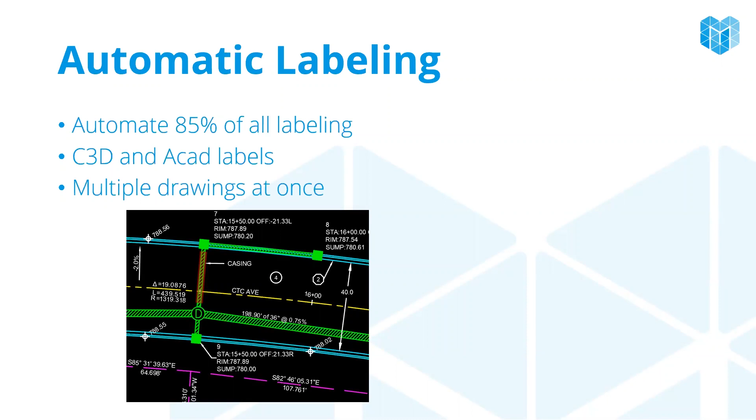Here's a screenshot of the UI, and I'll show you it in action in a bit. We get to choose our drawing sources, have detailed selection on what layouts we label within those drawings, choose what type of labels and anchor objects we want, and then have detailed control on the fields or data showing up within those labels. In the case of mText, we can pull in AutoCAD fields automatically. In the case of something like a line and curve label, that's based on your Civil 3D style. And down here, we've got detailed control on the formatting itself.

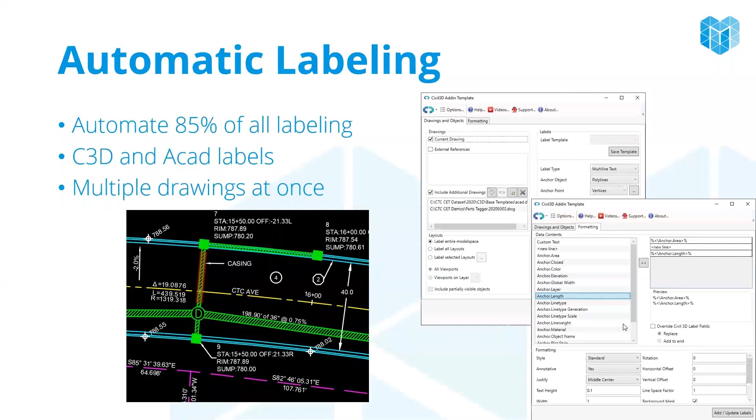Let me show you what this looks like. Let's take an example of a bunch of lots, and we need to label all of these lots at once.

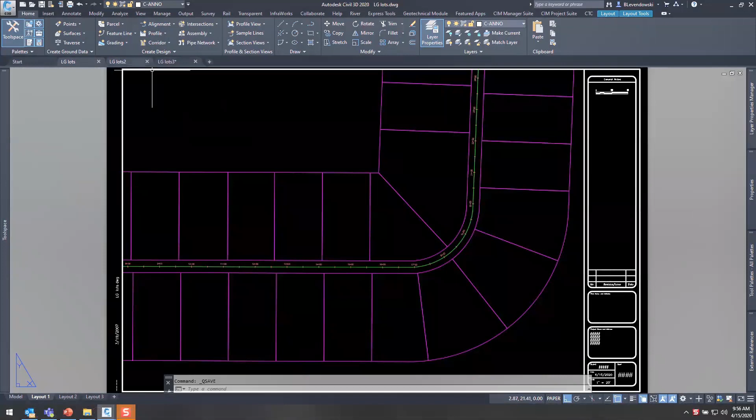Line and curve labels, it's a common thing, and we're picking these one at a time, one lot at a time. Now there are the parcel tools in Civil 3D, but a lot of people don't use them because they leave a lot to be desired. But what they do for us is help with some labeling.

Now we can do this across any kind of line segment. I'm going to choose polylines in this case. We're going to label the segments. I've got 3 drawings open here with multiple layouts in each. I've selected all these drawings, then I choose my styles and click add labels. Watch this—it comes into every layout in this drawing, and also in my 2 other drawings. We just added thousands of line and curve labels at once across multiple drawings. The time savings are huge on this stuff.

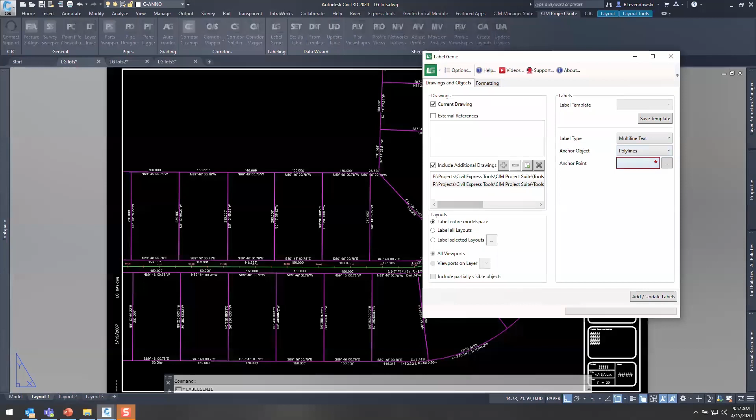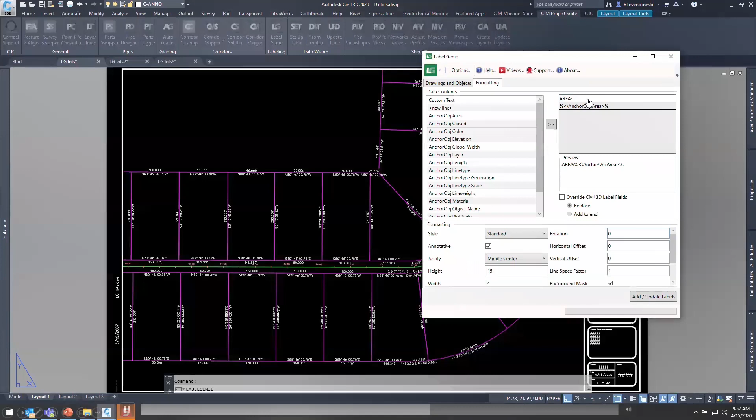Now Label Genie does over 100 different label scenarios. I've only got time to show you a couple here, but let's take something like mText on those same polylines. What if I want to place mText at the centroid of all of this stuff? It could be on hatches, feature lines, anything. Again, I've got style formatting down below, choosing my text type, these kinds of things, and I also spell out what component is going to label in that mText. I can push all those labels at once, all of these.

Now I'm starting with something simple here like polylines because this is the area that's really, really tedious in Civil 3D. We get some automation here and there, like I said, in pipe networks.

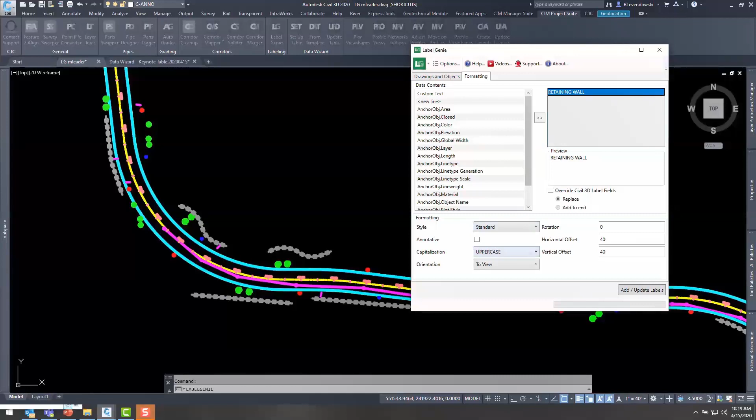Take something like this on a road project where we just need a bunch of callouts—let's take these retaining walls. I just want to insert leaders across all this stuff. Normally I'm picking and picking on all this stuff, but I can spell out some custom text, choose my MLeader style, some offset options, rotation options, and boom, it inserts across the whole drawing.

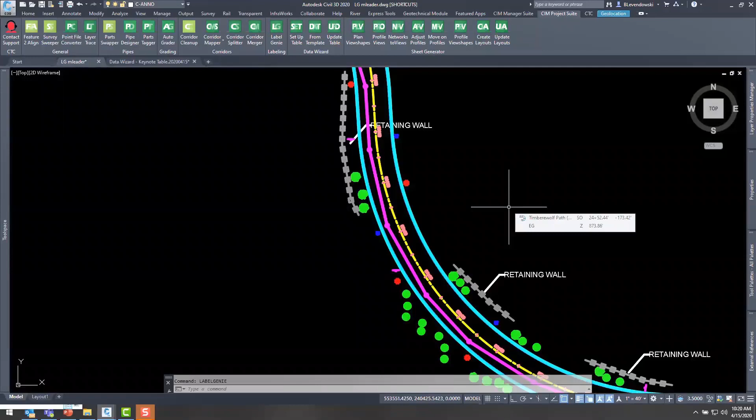Again, we talk about that 85% because you're going to want to come in here and tweak things a little bit. But I can spell out a label type, an anchor object, filter by layer, all these different controls, and automate that. I could spend all day showing you scenarios on this—there's over 100 label scenarios. You want to attach surface spot elevation labels to feature lines based on a certain surface, we can do that. Everything is there. So that tedious pick and click that you're used to, you don't have to do that anymore.

Let's talk about site grading in Civil 3D. A huge pain point in Civil 3D.

Let's think about some of the tool sets in Civil 3D. You've got pipe networks, dedicated tool sets for storm and sanitary design. And we've got corridors, which are great for road design and anything else linear, be it airport or rail or any number of things. But site grading is really clumsy. And when I say site grading, I'm talking about grading out parking lots, ponds, and residential lots, this kind of stuff. What are we stuck with?

Feature lines, which are nice and stable, but really tedious. One at a time, you have to update vertices on all of these. And then we've got grading tools, which are nice in theory, but really buggy, and they just don't really work. Anyone who's tried it knows that. Some people use corridors for site grading, but for the average user it's way too complex and confusing to use corridors.

With AutoGrader, we're looking to solve this. Take a simple site like this, where I've got a parking lot, a pond, and some grading around a building. We're going to be able to automate this grading by linking feature line sets.

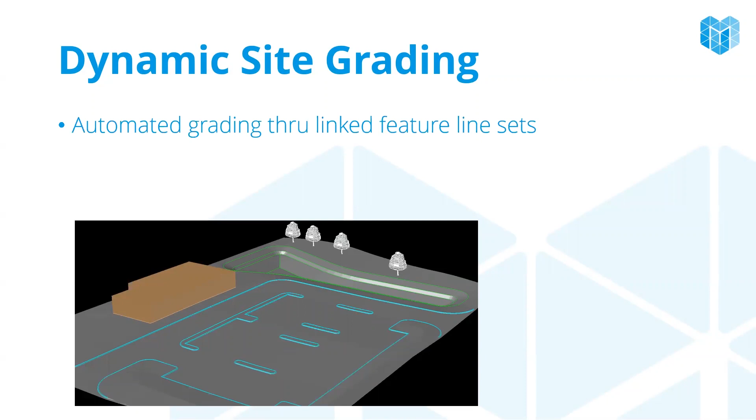Now you have to lay out some kind of base design for your project. But say you draw your gutter lines for your curb, you're then going to be able to spell out what we call grading families in AutoGrader, where you define parameters: offsetting to the left or right, the distance, and the slopes. AutoGrader even gives you a preview of what that template looks like. You're going to be able to execute these grading families on any number of feature lines.

And it's not just a creation tool, it's an updating tool as well. So as those designs change, you can refresh those families and everything will update. And better yet, think about your surface. That's what you're after, right? That's the end product of your grading. It's going to automatically add and manage all this stuff inside your surfaces as well.

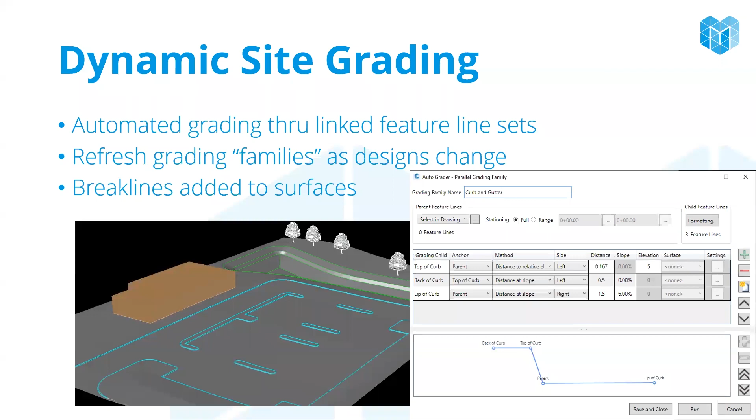Let's take a look at it. Here is that same site, and I've got some primary feature lines drawn for my curb and my pond. But now what would I be stuck doing? Doing all these stepped offsets. And then as soon as things change, it's really tedious.

So I'm going to go in here and create what's called a parallel grading family, where it automates 3D offsetting of feature lines for us. I'm going to define a top of curb, and as I do this, the preview updates down below. This is really cool, really intuitive on how you spell this out. The top of curb will be linked to the parent feature line, that's the red feature lines we see for curb there.

And then I can spell out the back of curb, just like we have for subassemblies and corridors. We can spell those parameters out here, but now we can save them in a grading family, and execute them on any project, on any set of feature lines.

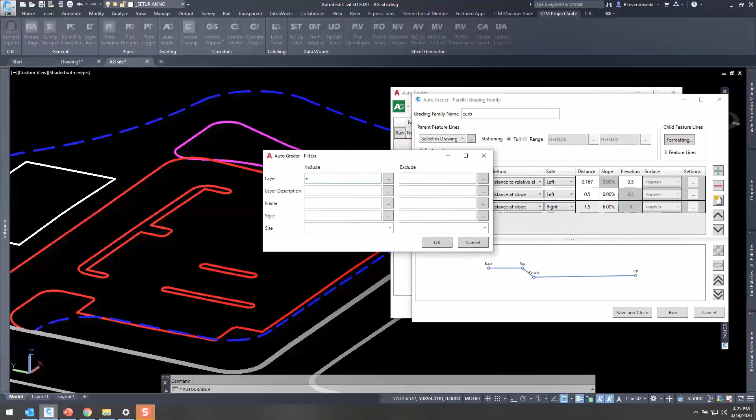I'm going to choose a layer so it grabs all the feature lines on that particular layer. I've got formatting options so I can control what styles and layers are assigned to these feature lines. And then finally, what surface will all these feature lines be added to? I've got break line settings, both supplementing factors and weeding factors.

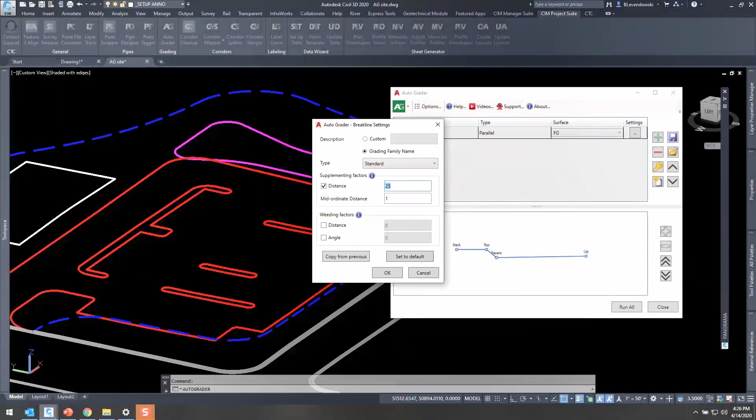And then I'm going to click run on this, and you're going to see on the left here, my entire parking lot graded out based on those parameters. Dozens and dozens of feature lines. Normally I'm creating those one at a time.

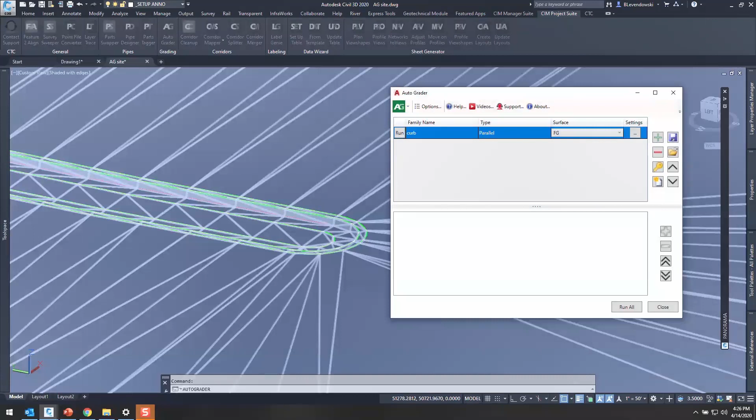And here's the thing, I kind of did this on purpose. We made the curb backwards. When you're automating something like this, it can be easy to choose the wrong side, left or right. I simply go in here and switch everything. I run it again, and watch all of those green feature lines, the automated ones, update automatically across the entire parking lot. And everything gets added to the surface as well.

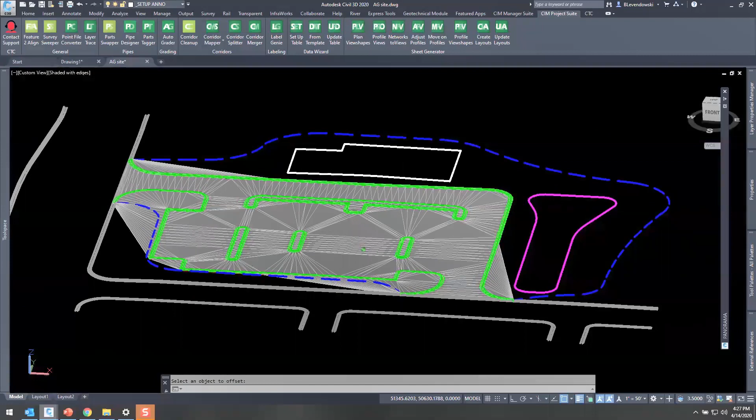Now these kinds of things you repeat from one project to the next. So I can load templates I've created from previous projects where I've got, in this case, all my benches and slopes defined for my pond. I simply run that template. I can edit it if I want, and then it executes on that pond feature line.

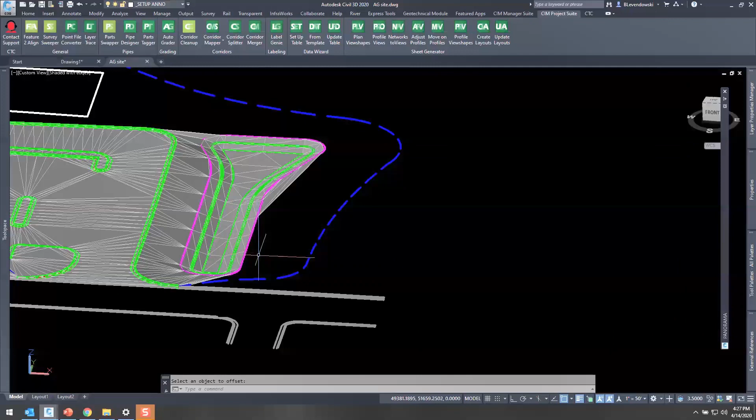Think about other scenarios, grading around buildings, simple daylight grading. I can load those templates. Those are external template files, text-based JSON files. They're really easy to work with, but you can load them right into here.

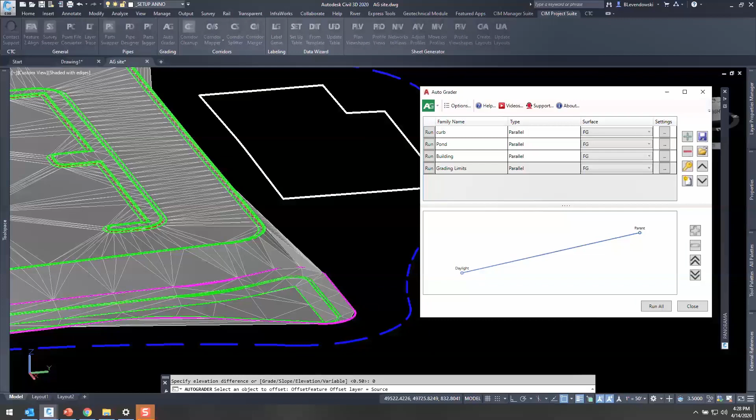I'm going to run all of these families at once. So this is what it'll look like in your project. You'll have multiple grading families for different parts of your site, and we even do surface daylighting. See how it's daylighting from the blue feature line to our existing ground surface.

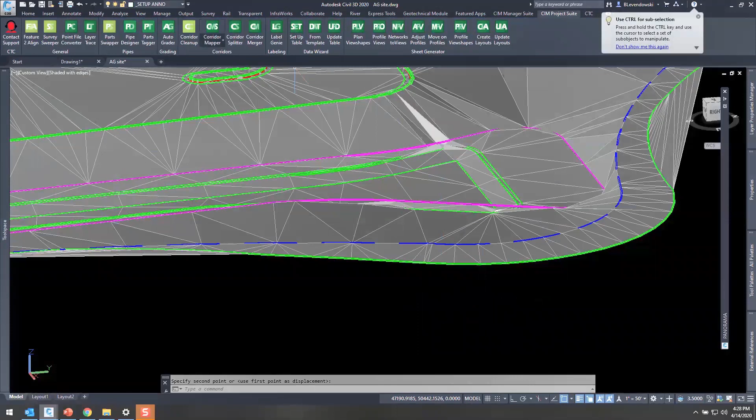Everything in here is dynamic. If I make a simple change like the positioning of the pond, I move that parent or primary feature line, then come in here and run the pond grading family again. Watch what happens, the entire pond updates. I did that in seconds. That would have been 20 minutes of work, right? And we're doing that over and over.

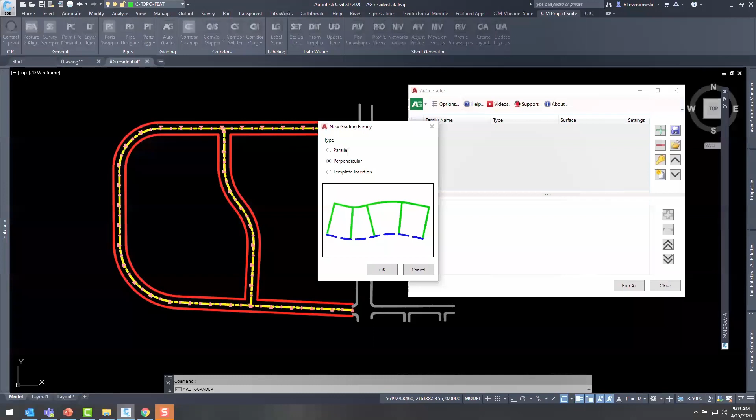Let's take a different scenario, grading out a subdivision. Instead of parallel offsetting, we can do perpendicular creation like side lot lines. I'm going to do this outside lot just as an example here. What I want to do is spell out the grading along those side lots. So instead of spelling out the offset parameters, I'm going to spell out the grade breaks along that side lot line. This is again another really tedious part in Civil 3D, and we're automating all of it here.

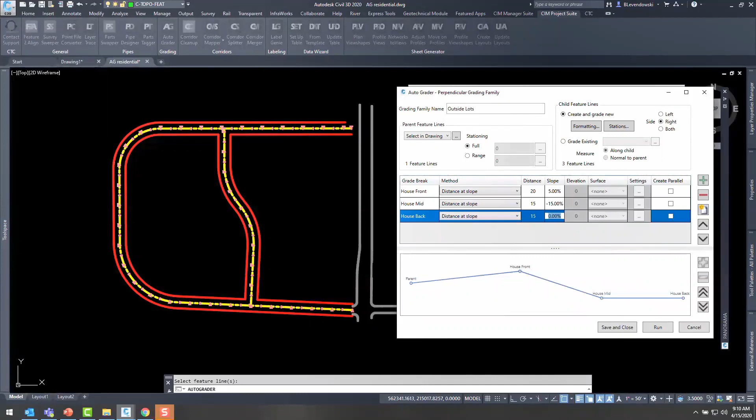So I've got the front of the house there where I've got a grade break, the mid of the house, and then the back of the house pad as well. As I'm doing it, you see it's showing in the preview what this grading will look like. And I've got the back of the lot as well, okay? Now this is a residential scenario, but it could be anything.

It could be pads along a service road for a wind farm, anything where you need to automate the generation of feature lines perpendicular. I can tell this to do every 60 feet. I could also pick different locations in the drawing. And then of course I've got that formatting again, style and layer automation. Choose my surface, and now watch how fast this is. Boom, it creates all those lots and grades them accordingly.

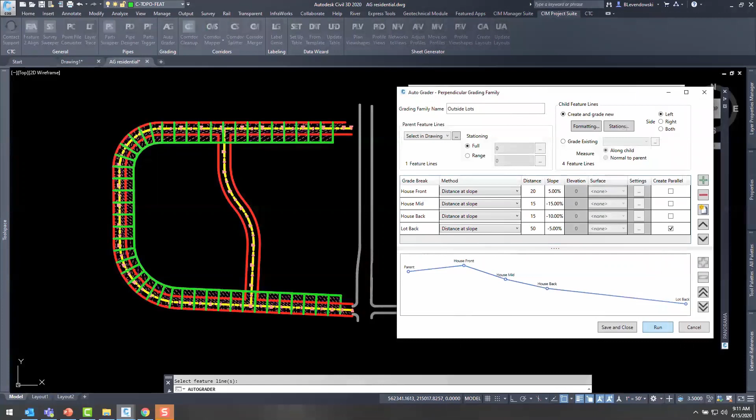And again, I wanted to show you, what if you didn't like it? Okay, just go in and change the parameters, run the grading family again, and everything will update. I changed that distance on the lot back, run it again. Okay, that kind of stuff takes hours of work.

Here's one of those side lot lines. Here's all those grade breaks I spelled out. You can see the surface model in there. Okay, we can grade out pieces of our site in a matter of minutes instead of hours.

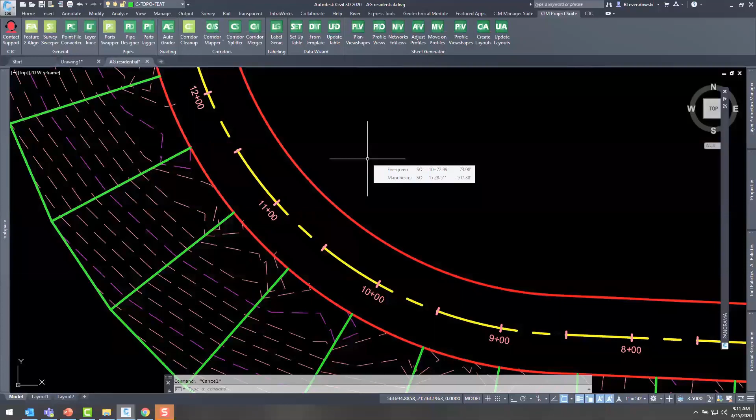So this is the other one I'm really excited about, AutoGrader. Both of these tools, Label Genie and AutoGrader, are coming out May 4th. And then as well, the 2021 upgrade to all of our projects, the entire CIM Project Suite and the manager suite, are also coming out May 4th. So guys, I can't tell you, this is the most excited I've been of the products we've put out there. Take something like Label Genie, this is something that addresses every single project we do out there.

Let's talk a little bit about the future tools, and then I'm going to turn it over to Shawn after that, and he's going to talk about some of our building solutions.

We've got a tool coming out soon called Earthwork Processor. This is about subgrade volume calcs on sites. Pipe Jammer, we're going to be able to take pipe and pressure networks and import and export to and from Excel. Clash Seeker, this is robust clash detection across multiple object types. And then we're also going to be releasing HIVE for Civil 3D. Working on the development of that right now, and we're going to talk a little bit more about that when Shawn takes over.

So let me just show you a little bit more detail. Earthwork Processor, subgrade volume calculations. This is like a parking lot where you've got varying depths from heavy duty pavement to light duty to sidewalks, and you need that subgrade surface.

We're going to automate the labeling and the hatching on all that. And here's kind of a little mock-up of the interface where we can define all these different areas where, based on a polyline or a feature line, we can grade out these subgrades.

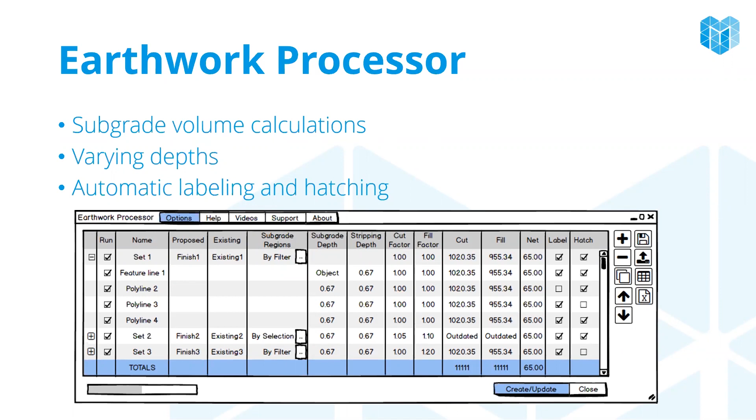We can account for cut and fill factors. We can label and hatch the stuff. We can export it to Excel, bring it into an AutoCAD table, you name it.

Pipe Jammer is another one. We're going to be able to take networks and push them out to Excel. Now we've got a number of pipe tools in there already. Pipe Designer is a really robust tool where you get to work right in Civil 3D to design pipe runs

in a really intuitive way. But there's reasons where we need to take our entire pipe network for analysis purposes. Maybe you want to bring in a third-party app, you name it. But we're going to be able to have detailed formatting controls. And then also when you import that Excel network back into Civil 3D, it'll update those networks.

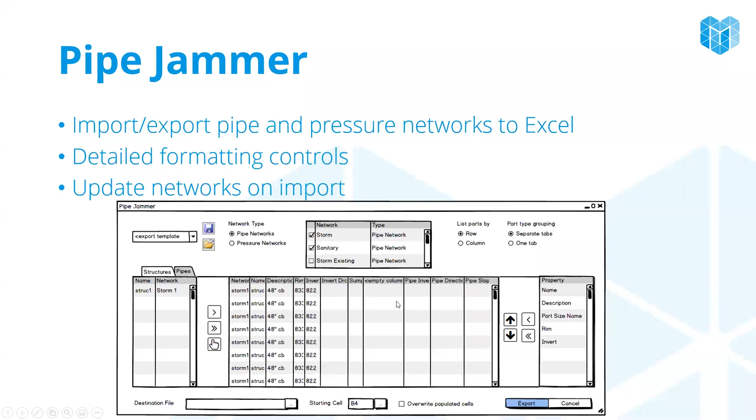So here's what this interface will look like. We can choose any number of structures, fittings, or parts. What properties do we want to export? And then we have detailed control on the column order and what this will look like.

Clash Seeker, another one. Like I said, robust clash detection and reporting. Right now in Civil 3D, there's a simple tool that does clash detection between pipe networks. Super limiting. We're going to find clash detection between feature lines, surfaces, corridors, solids, you name it. A really robust tool to find those clashes or those proximity violations, right? If two objects are closer than they need to be.

You're going to be able to annotate and table all this stuff. Again, a really cool tool.

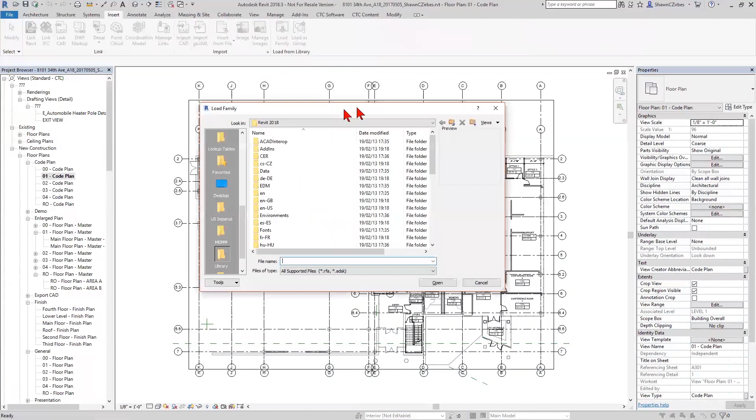Standard workflow: you want to load a new piece of content into your project, you use the load family command, you browse around, you try and find it, double clicking into folders, picking something that is probably right by file name only, choosing some kind of types if there's a type catalog to load this into your Revit session.

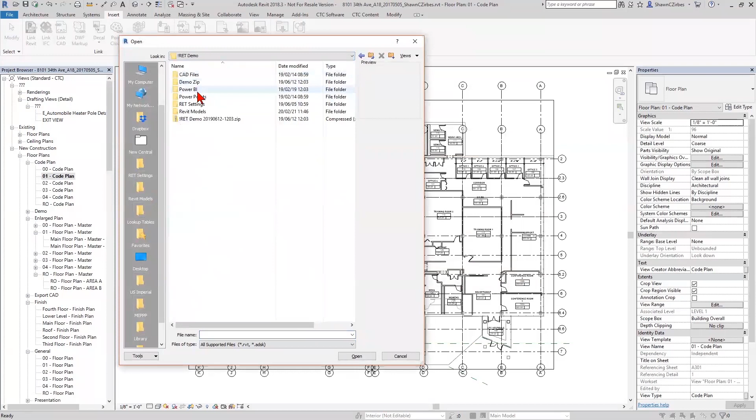If you needed to grab, say, drafting views or schedules from another project, you're browsing again for a project file, this time using a different command to find that project, then choosing what it is you need, filtering down, browsing through by name, and then grabbing what you need to bring into your project.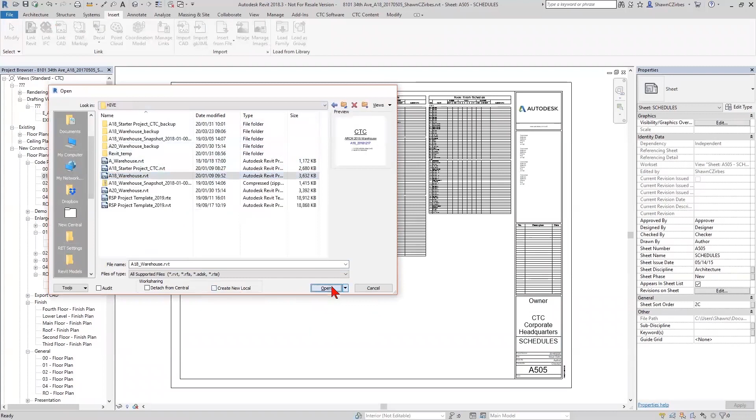And let's say you needed to transfer project standards for system families. This is wall types, floor types, ceiling types. You have to first browse to some place on your network, open up the project correctly, hopefully with all work sets in most cases.

This is a part that's really time consuming. Then you can go into transfer project standards, make sure you check the right stuff, grab the right category, click OK, and then you have to handle all the duplication that comes in. There are 3 different commands for loading content into your project.

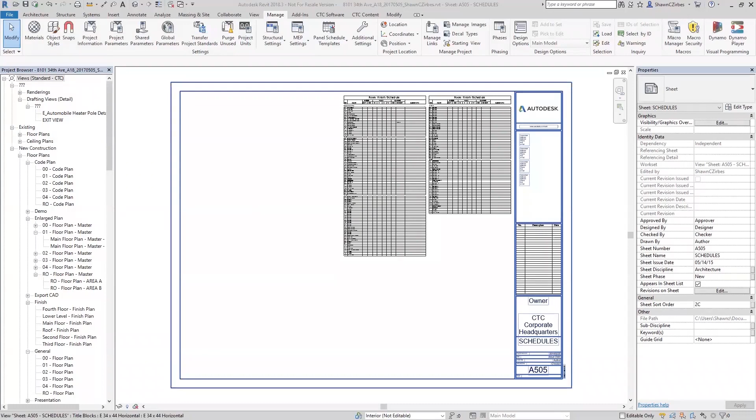That's inconvenient. So this is why CTC developed HIVE in the first place, to offer better browsing of content, really quality user management, permissions management, and we're adding in analytics every day. That's all important because for you as BIM managers, for you as end users, to be able to best find what it is you need, there can't be 3 or 4 different ways of finding it, different processes and different file sizes that are slowing you down overall.

And this is not just a problem in the building industry. This is a problem on the civil side as well. There are tons and tons of file types to manage. Now, I know you guys have tool palettes, and we'll talk about this a little later on, but we're going to be looking at how we can get HIVE usable by your teams as well.

Now, with HIVE, I want to show you some things about HIVE, specifically our brand new HIVE, because HIVE this last year underwent massive updates. On the building side at CTC, the vast majority of our development efforts have been in HIVE's interface, both in the content management system and on the website. So we have a brand new CMS, content management system user interface, for the end users themselves.

I'm going to pull this forward right now. This is the new UI for HIVE. If I go into this environment here, the home page is much more simplified than the previous iteration. This is all based on feedback, and you're going to hear me say this a few times throughout today's discussion. Your feedback is 100% what drives our development efforts at CTC, okay?

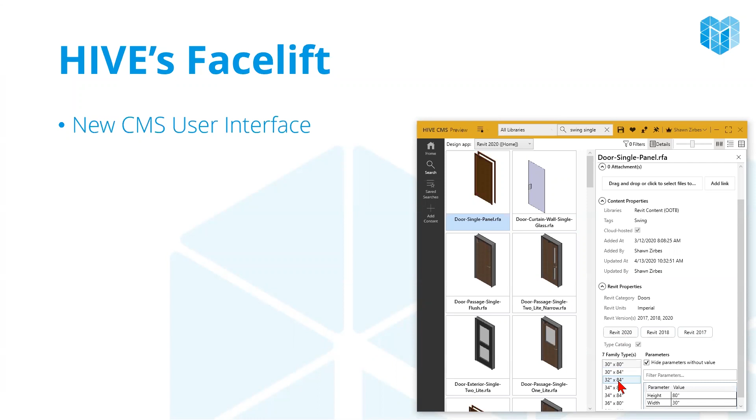With this content, as I load it, if I was loading this into Revit, it would automatically pop up a window to let me know what version it is I'm loading and which types it is I wanted to bring in. I don't have a single instance of content per version of Revit anymore. It's all zipped up into one. There's one single door panel, and that serves, if I was to close my filters and show you the details here, in my case, 17, 18, and 20. I haven't loaded a 19 version of this. But I have the individual family types for each of these, and I can selectively load whichever ones it is I want that's the most relevant.

For you BIM managers out there, when you are adding content, let me go grab a folder of content. Once this File Explorer opens, we'll go use some out-of-the-box content here. This is all that browsing stuff that end users would normally do that I can pre-do for them.

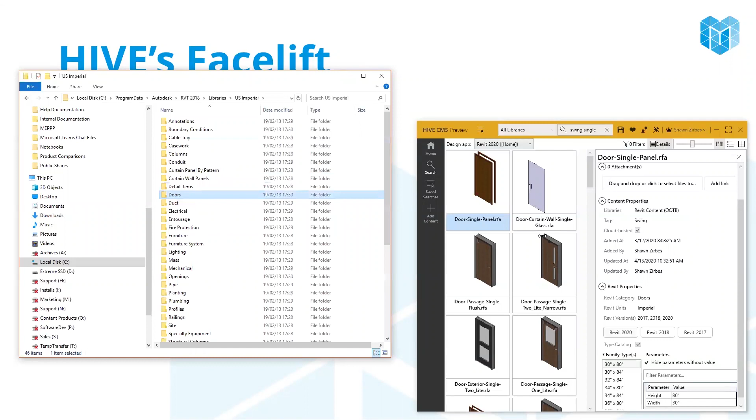If I wanted to add, say, the Imperial doors into Hive, if I simply drag and drop this onto the Hive interface wherever I am, if I have the ability to add content, it brings me directly to add content and grabs that content, throwing it in here.

You'll have the ability as BIM managers to go through and choose exactly how you want this content to look. I can choose what the visibility settings are, explicit appearance settings, category by category, and even explicitly pull out what kind of hosting types. So if it's wall hosted, it might appear one way. If it's ceiling hosted, it maybe appears a different way.

All of this was based upon, again, the feedback that you all have given us.

Finally, before I jump back into the main PowerPoint, with the content processor itself, I can choose which parameters are actually searchable in Hive. As I fill this out, it instantly takes effect across the board for all users in my company. So instead of them searching every parameter, now Hive is really laser focused on specific parameters, and that helps to narrow and refine your search results custom to how you work, because everybody wants to work a little differently.

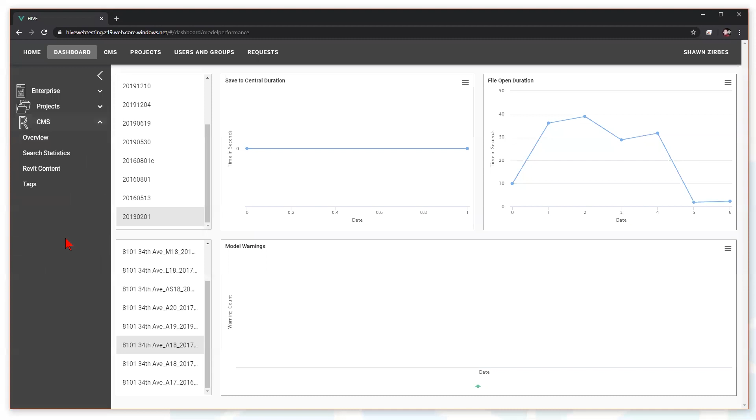But in addition to that, we're adding content analytics in this release. So when 2021 releases, you'll be able to go into the CMS side as well and understand how many total libraries and total tags and content, how many people are favoriting things, what kind of search statistics we have, what kind of Revit content is loaded, and what are my top 10 families. Tons of feature-rich tools here to help you, the BIM managers, understand how Hive is being used in your firm and how you can improve your libraries to make it even more usable for your team. That's the goal, making Hive the core of all of your content searching.

Now, as Brian mentioned, I'm going to mention this in a minute here, we are looking at how Hive can actually function really well in the Civil 3D space as well. But more on that in just a minute.

First, I want to talk about two other tools in a little bit of depth so that you can understand what was added in addition to Hive, beyond Hive, to our suites. In fact, you can go get these today if you wanted to. I mentioned length calculator in an earlier part. We released this just a little while ago. This is a very fresh re-release of the length calculator. This is backed by popular demand. Again, CTC listens to what it is you want.

We can't always do it tomorrow, but we try to do it as quickly as we possibly can. Length Calculator, in this case, we pulled it off the suite because we felt that Revit 2018 had all the features you needed to achieve the same thing.

But those of you in the MEP space, you disagreed strongly, and so we brought this back. It's in the project suite, and it is a free tool. What this effectively allows you to do is figure out the connected lengths of duct, pipework, conduit, and cable tray based on your selections.